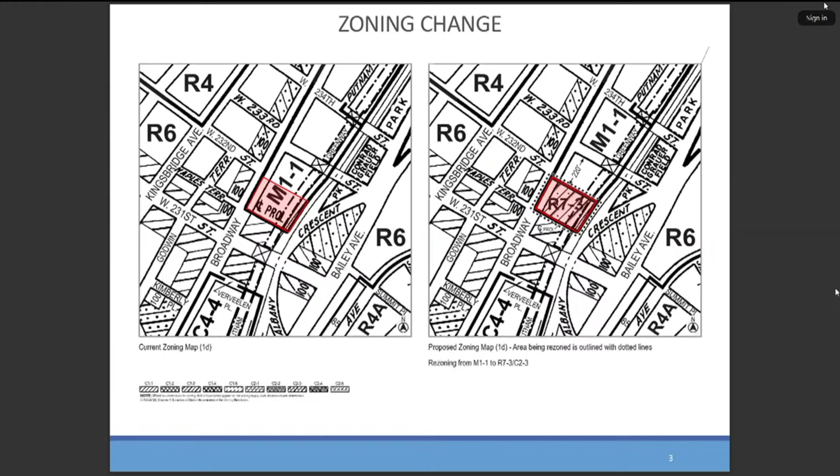So we're here seeking the approval of two land use actions. The zoning map amendment would change the existing M1-1 zoning district to an R7-3 zoning district with a C2-3 commercial overlay. We are also seeking a zoning text amendment to establish a Mandatory Inclusionary Housing area, or MIH area, to ensure that 25% of the residential floor area of the project is set aside as permanently affordable. We'll also note that for HPD-subsidized projects such as this one, HPD requires an additional 15% of permanently affordable units to be set aside. Next slide, please.

Here's the site plan. The architects worked with this very constrained site. The site's essentially flag-shaped with minimal frontage on Broadway. The design goals were to accommodate the affordable housing program and maintain parking at the site to avoid disrupting a neighborhood parking resource. The configuration of the site with this limited street frontage proved challenging, but the R7-3 bulk envelope allows for a design that provides a sufficient number of affordable units and allows for parking. The R7-3 is appropriate for an affordable transit-oriented project like this. I'll note that the required yards on both sides of the rear portion of the building create separation from the existing non-applicant-owned buildings along Broadway, and the greenway at the rear, or east, of the site. Next slide, please.

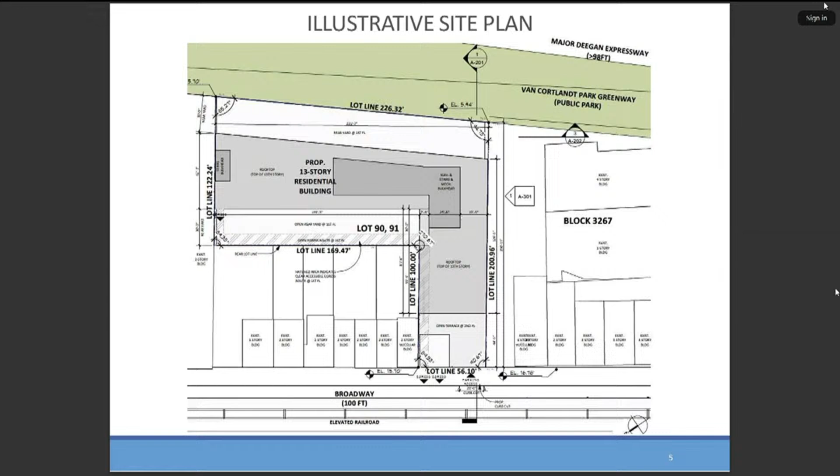Just have 2 more slides. In this slide, you can see the building within the existing built context of the neighborhood.

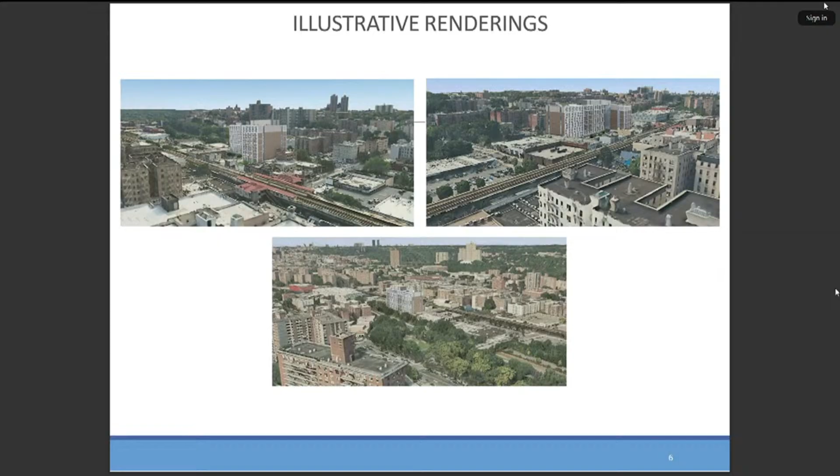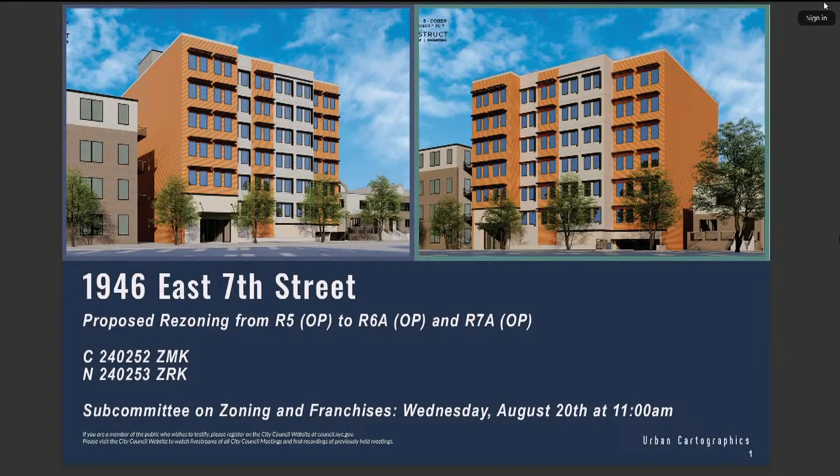And if you can go to the next slide, the right-hand side of that screen would show you that it has 47 apartments, single 1-bedrooms, because seniors desire mostly 1-bedrooms, a larger than required rear yard of 35 feet, where a 30-foot rear yard would be required, and the building is proposed to be at 6 stories, the result of a proposed rezoning that will rezone that corner to R6A, which you could see in the middle of the slide. And at the bottom, you could see the corner itself would be R7A.

The left side of the screen shows you the series of existing 4-story buildings that we're speaking of. The two that you see on the left-hand side next to the single-family home would be replaced by the 6-story building on the right side of your screen, essentially creating new housing opportunities for people in the community that are seniors. Next slide, please.

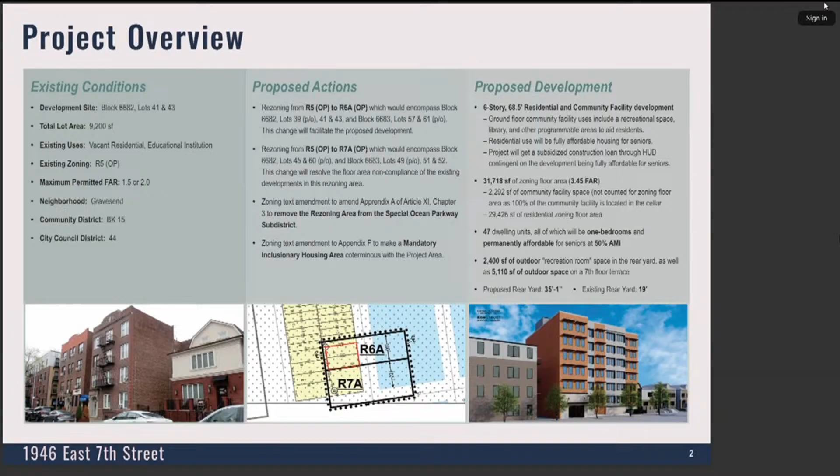This shows you the zoning map change in specific detail. The left side of the map shows that we're situated within an R5 district. It also shows, signified by the big letters OP, that we are in the Ocean Parkway sub-district.

Part of the application, in addition to requesting the R7A and R6A zoning, would also request the removal of the property from the Ocean Parkway sub-district. The sub-district was put in place to prevent the proliferation of larger community facilities, at a time before there was such a pressing need for housing. So that is the justification for removing it here.

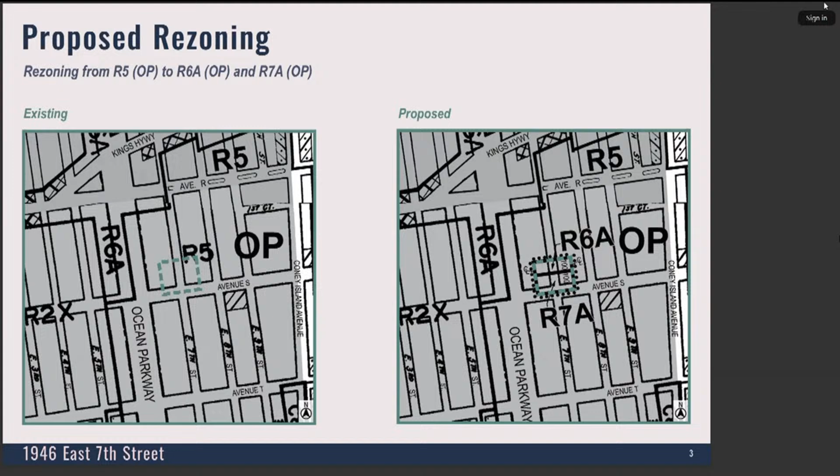Next slide, please. This shows you in more detail what I was just speaking about. Next slide.

If anybody is curious as to how long an application in New York City to create affordable housing takes, it takes 7 years, and then there's still no guarantee that when you get to the end of the ULURP process, you'll get it approved.

This application started 7 years ago. The left-hand side shows its original incarnation, an 8-story proposal. It was proposed under what was called AIRS, Affordable Independent Residences for Seniors. Somebody in their infinite wisdom decided they didn't want to keep that program going a few years ago, and that program was removed from the city's zoning resolution.

That left us with the proposal you see in the middle, which culminated after City of Yes was proposed, which brought the building to a 7-story building. So we went from an 8-story building to a 7-story building.

And now, after meeting with the community and having extensive conversations with them, even though the community board did oppose it, you'll find testimony on the city planning record indicating a 6-story building would perhaps be acceptable. So on the right-hand side, in response to the objections raised at the Community Planning Board and concerns from neighbors, we have reduced the size of the building to 6 stories in height, and removed the bulkhead that was previously proposed.

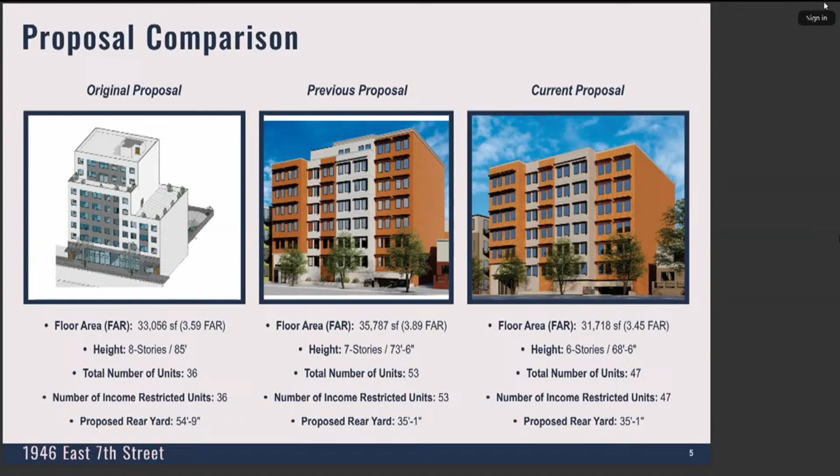The next slide gives you an example of how long we've been at this and the numerous iterations of the proposal, for the reasons just stated. It gives a chronological history: the original proposal, the response to community concerns in reducing building height, City of Yes bringing the height back up—which wasn't the brightest move on my part, as it upset a lot of people—and now we've brought it back down to 6 stories. So this is our proposal now, a 6-story building.

If you go to the next slide, please. The next slide tries to make a very strong land use argument and a rationale that this is the right place and the right spot for the right building.

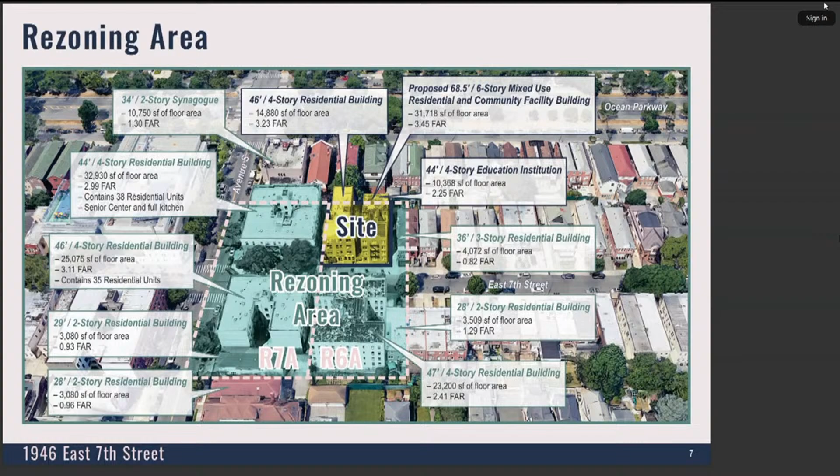All of the buildings you see in green, turquoise, and yellow here are part of the same Ahiezer organization. What you can't see on the left-hand side, you'll see clearly on the next slide—it shows all the buildings that are part of this community that thousands of people utilize, providing much-needed social services: help with finances, help with food, food distribution, educational classes, social programs, programs for children, adults, and higher or continuing education. All of that occurs in the buildings highlighted on the screen. They are all owned, controlled, and operated by the Ahiezer organization, which has been operating at this location for decades.

Many people at the community level were upset with the proposal. In fact, I received opposition on this application like I've never received on any application I've ever sought to pursue in New York City. I believe the reason for so much opposition is that the area is already developed with existing community facility uses that some people in the neighborhood may feel are overbearing upon the community.

My response to that is, but that's where the people are. If you ask us to move this building and build it somewhere else, it's not going to be for the very community we're trying to serve. I'm going to show you a slide in a second that shows the lack of affordable housing that's been built in this community over the past few decades.

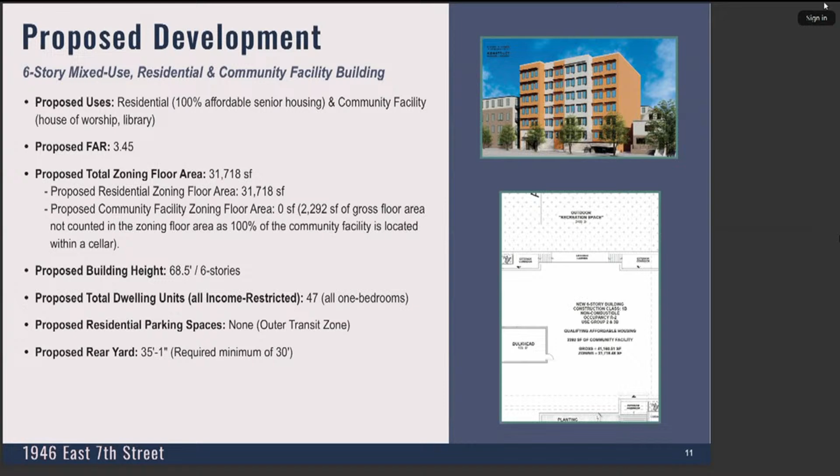The buildings surrounding us are 44 feet. The center's building is 58 feet tall. Our building is 68 feet tall. The point is that the neighborhood, although opposed to the tall building here, is not a stranger to taller buildings, few of which serve as much of an altruistic purpose as this would.

The slides got juxtaposed. I created this slide because people are telling me the building is too tall, it's out of character, doesn't fit within the block, and will cause mayhem. I'm showing you that if I brought my mother, who's 83 years old and doesn't know much difference between building heights, and put her on the street and asked what she thinks of the building on the right compared to the one on the left, she'd look up and say, 'is it taller?' The reality is it's not much taller than what's existing there right now—22 feet taller, which from street level isn't much of a perceptible difference.

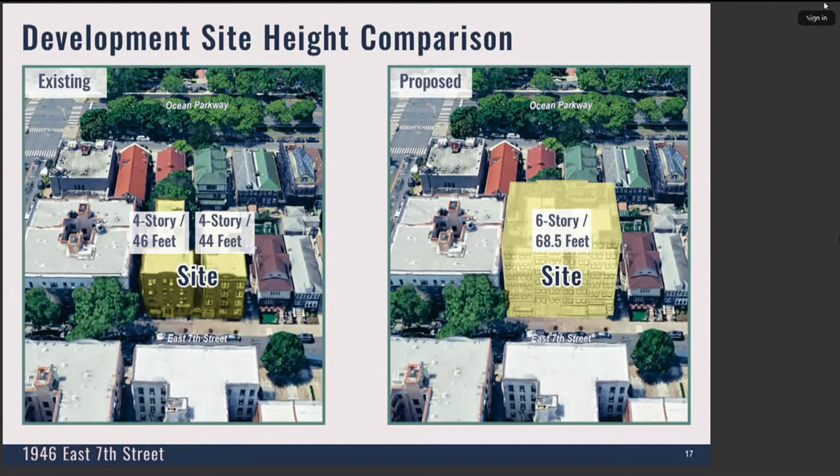The owner, the operator, Ahiezer organization, Elliot Harari, is here today, and has gone through great lengths to direct his architect to try to accommodate community concerns. One of the concerns was the rear yard of the building. The rear yard is proposed to be 35 feet. As you can see here, it's required to be 30 feet, and it's substantially larger than most of the other rear yards.

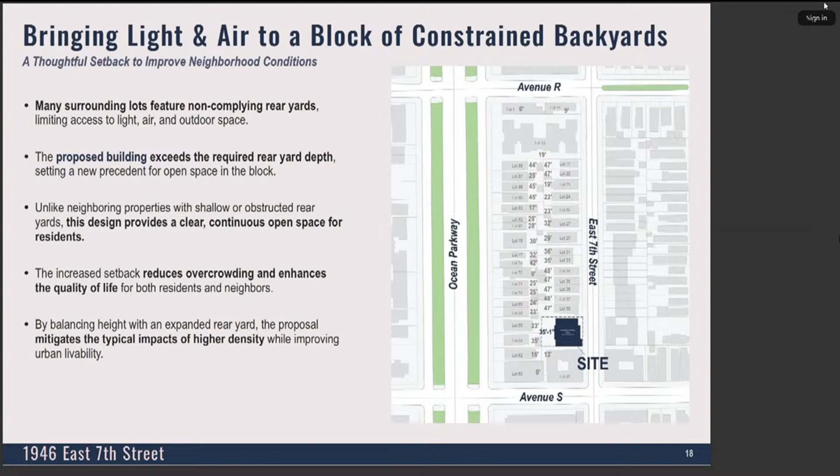I will wrap up by clicking ahead. If you can click ahead to slides 21, 22, and 23, it should be a pink slide. There you go, 2 more please, 1 more please. Okay, this slide is... and I'll stop here.

There is community opposition. I'm sure as God made green apples, there are people opposed to it. There's also support from the borough president, support from the city planning commission, and some community support that's not voiced as loudly. The councilman is in a very difficult position here. I respect him and his decision-making abilities, and he's got quite a few pieces of information to weigh. Everybody involved in the process has been fair. Everybody thinks the overarching goal is deserving, and I hope we all come to the right decision together.

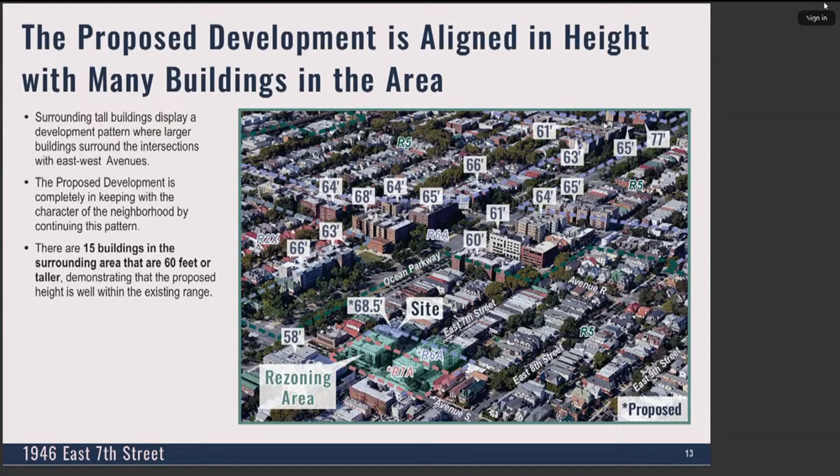So I just want to know, if you can please, the proposal is facing unprecedented community opposition. And you mentioned yourself that usually there's a deference when people want to build for the community. Can you explain how you believe this aligns with the existing character of the neighborhood, particularly in terms of scale, density, and overall use?

Would you like me to respond, Councilmember? If you want, if you want to say that it doesn't, then... Well, you know, objective, yeah, but not. I disagree on the character issue only because of what I showed you to the room a few minutes ago. There's existing 44-foot tall multiple dwellings on the property right now.

This building is proposed to be 24 feet taller, somewhat analogous to the height of the community center on the corner that stands at about 50, 58 feet, so just 10 feet shorter than that. I don't think we're worlds away from the existing buildings, and I think we could all understand that in today's society the spatial demands of people's living needs are different than they were decades ago, and buildings with modern facilities, modern heating systems, recreational spaces and community spaces are preferred to buildings that are 100 years old.

If this is not approved, the question was asked before, what can we do? Well, one option would be to retrofit the existing 100-year-old buildings and make those senior housing. That's allowed to be done. And all of the concern being given about traffic, noise, garbage, people coming, and the elderly causing a commotion or adding to the commotion on the block would still be there.

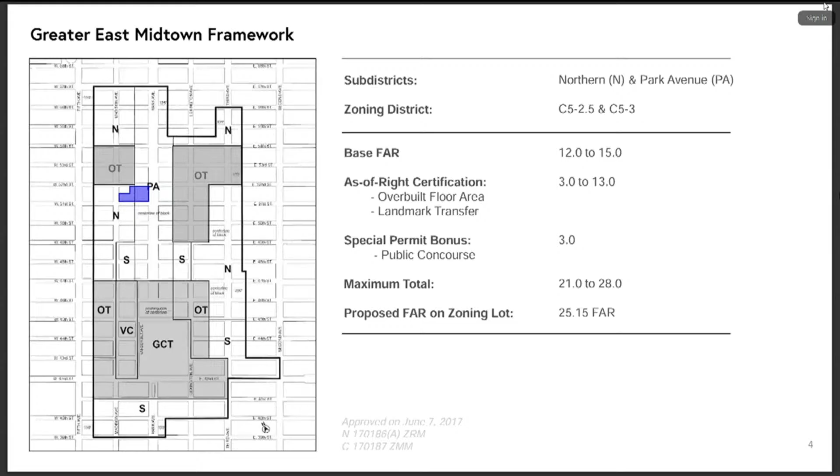I'll start with the bottom of this slide. There are 2 as-of-right certifications that have already gone through the process. Those get to the bulk of the floor area in the building. East Midtown attempted to incentivize the demolition of outdated, overbuilt buildings by allowing a buyback of existing overbuilt floor area with contributions to a public realm fund, and also to support the upkeep of landmarks in East Midtown through an as-of-right transfer of their development rights. What's before us today are 2 special permits: the 3 FAR bonus for the public concourse special permit, as well as certain waivers available for a building using that extra floor area under the qualifying site special permit.

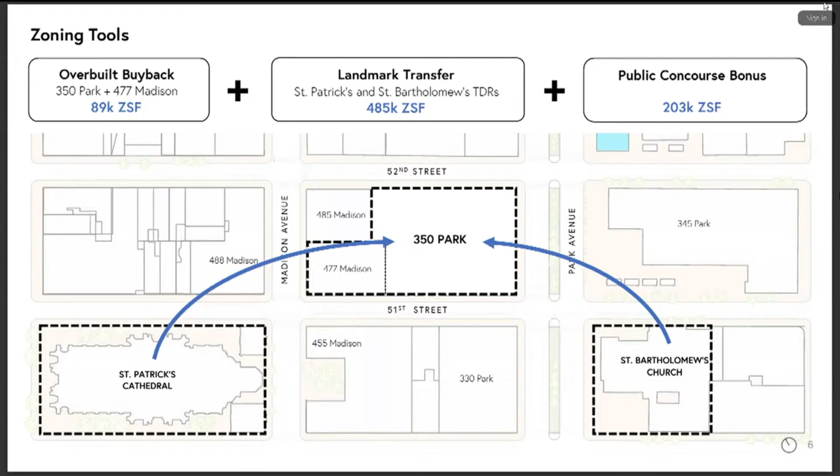This is an illustration of where the floor area is coming from, with arrows coming from St. Patrick's Cathedral and St. Bartholomew's Church, which comprise the bulk of the floor area for the addition in this new building. There's also the overbuilt buyback of 89,000 square feet and 200,000 square feet of public concourse bonus.

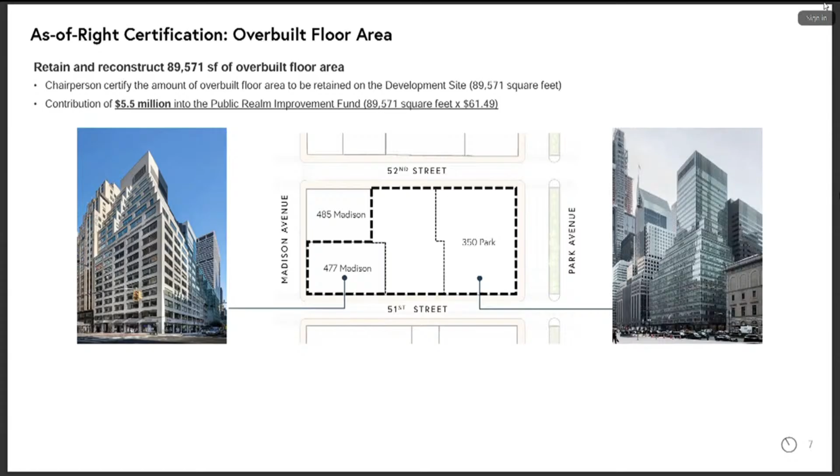These as-of-right certifications result in a contribution to the Public Realm Improvement Fund. For the 2 overbuilt buildings on this site, it results in a $5.5 million contribution to the Public Realm Fund. The transfers from the landmarks each come with an additional contribution as well, totaling an additional $30 million to the Public Realm Fund—a very sizable overall contribution.

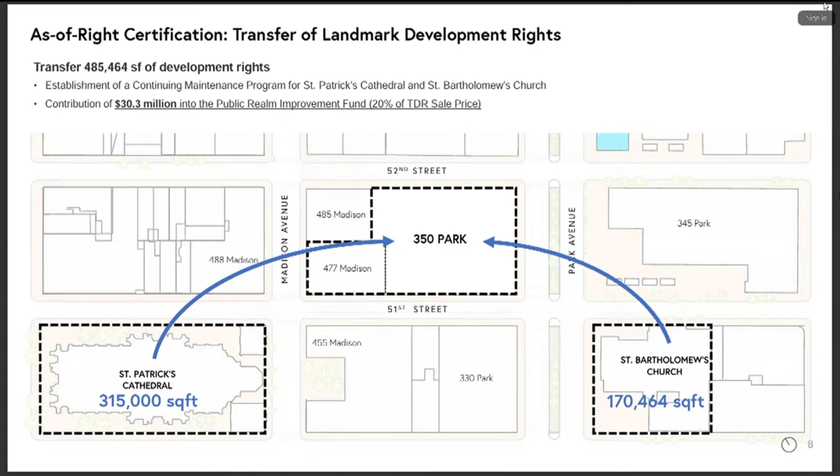So there are very material supports for these historic structures in the district, totaling about $150 million to ensure the future upkeep of these gems in East Midtown, as well as almost $36 million into the Public Realm Fund for the governing group to decide how to use for projects in the district. I'll hand it back to Barry to walk you through the building and the public concourse.

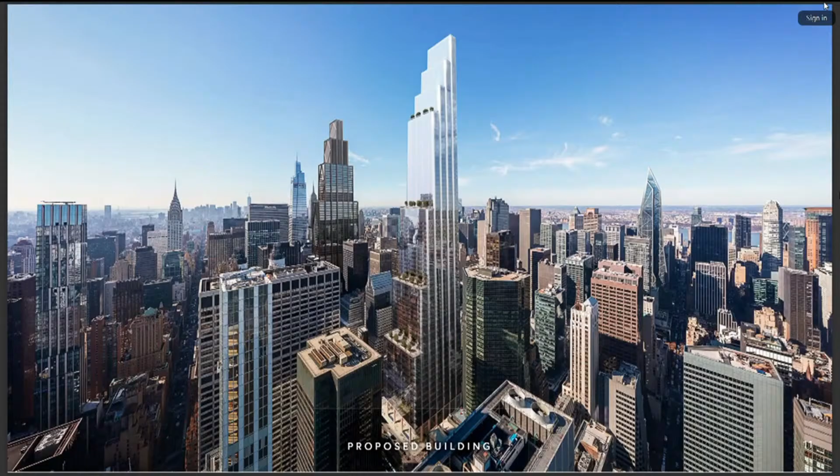Here's a rendering looking southwest of the proposed building, designed by Foster & Partners. As you can see, the building steps back off of Park Avenue. Its north and south facades are articulated by a series of flutes that run the full height of the building. The building also leans in from both 51st and 52nd Street to maximize light and air down to Park Avenue, as well as to the 2 adjacent side streets.

The building will be highly sustainable. In fact, it is using the ultra-low energy tools within the zoning resolution. It will be all-electric, with a triple-pane facade. Vornado is a leader in sustainability, and our best efforts are reflected in this design proposal.

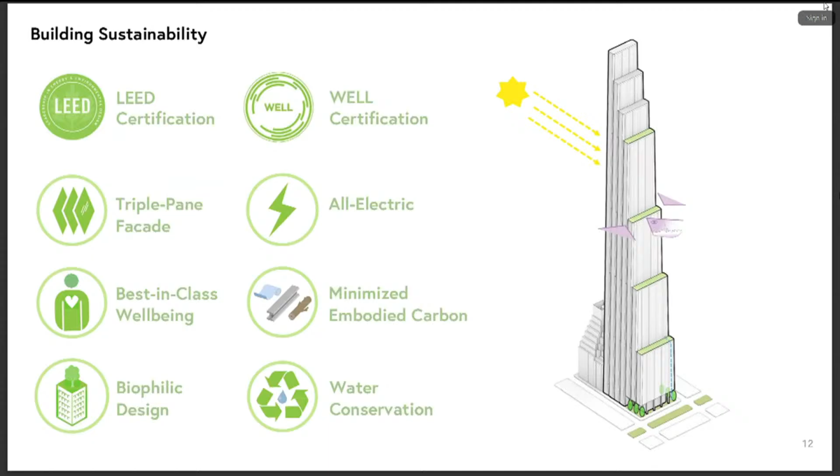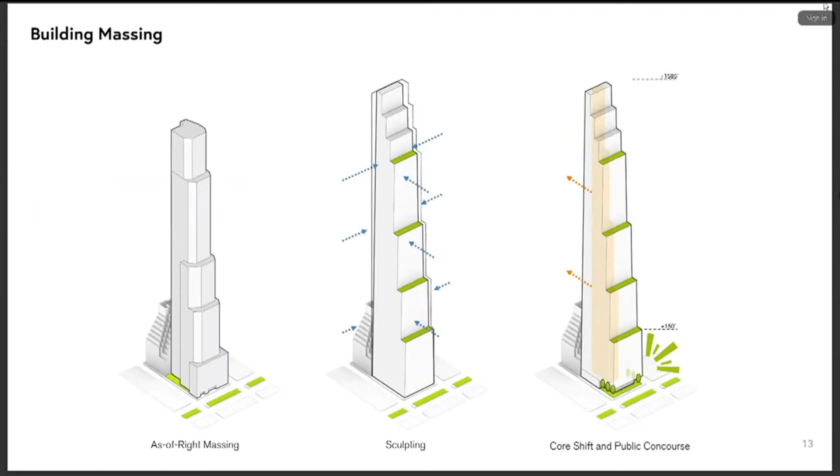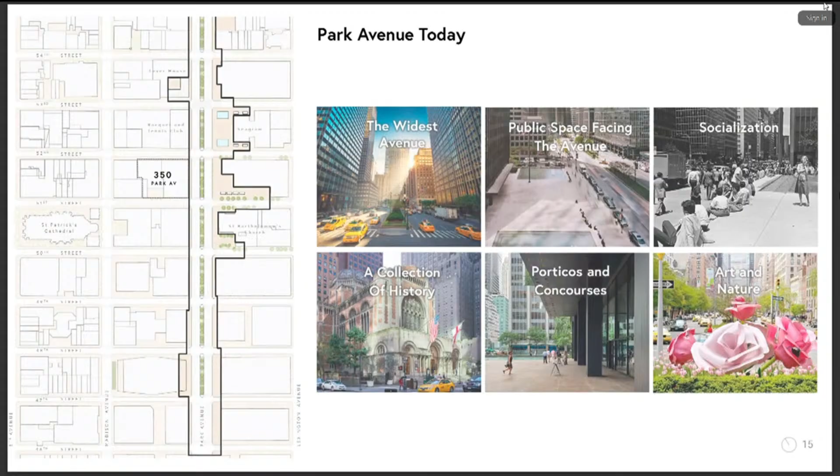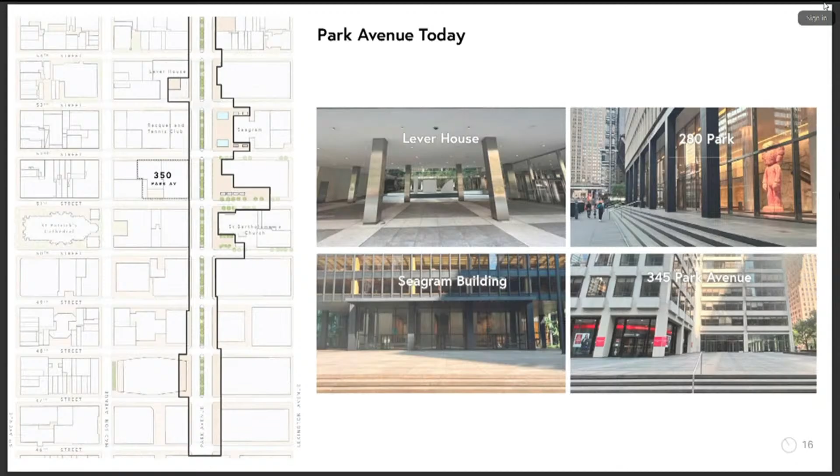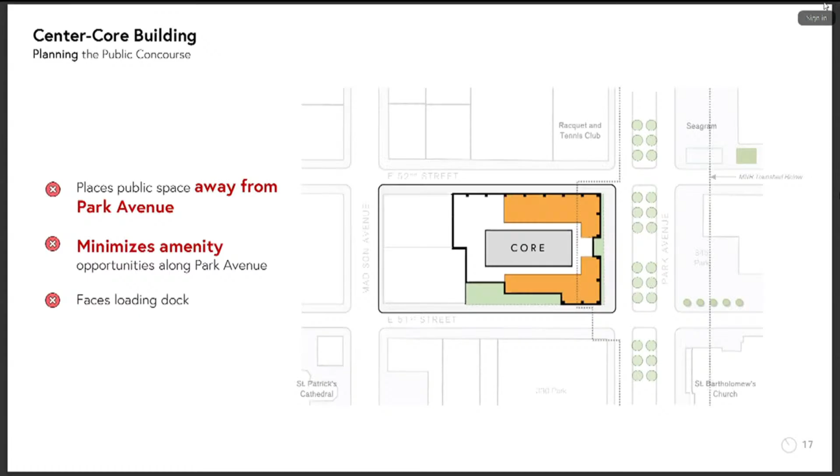Several of the public spaces along Park Avenue are elevated by several steps, a direct response to the Metro North train shed that exists underneath Park Avenue beneath several of these buildings. In an as-of-right building, the avenue frontage would normally be occupied by bank branches or, in some cases, even a Ferrari dealership—the normal condition on Park Avenue—with public spaces located on the south-facing block on 51st Street, adjacent to loading infrastructure and other things typically found on 51st and 52nd Street.

The proposal is to dedicate the Park Avenue frontage and the corners to the public concourse space. We're doing that by pushing the building's core further into the footprint of the block.

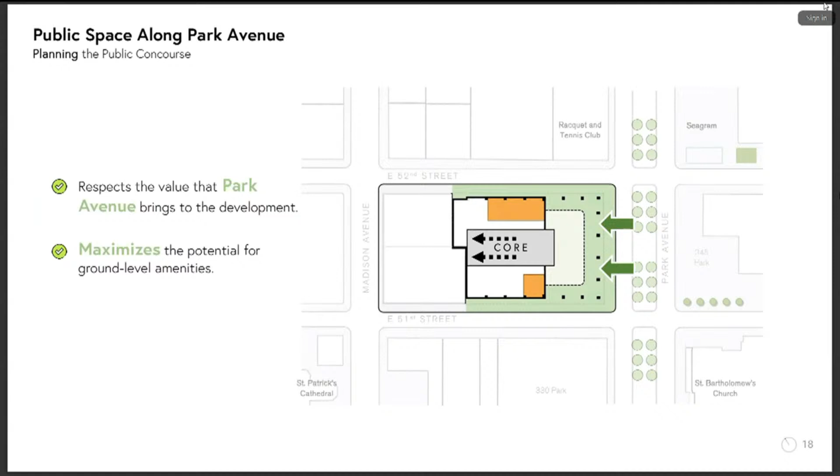We're also proposing to open up the corners of the project by cantilevering the structure out, removing the columns that otherwise would be there. That creates view corridors to the adjacent landmarks at the Seagram's Building, St. Bart's, and the Racquet Club.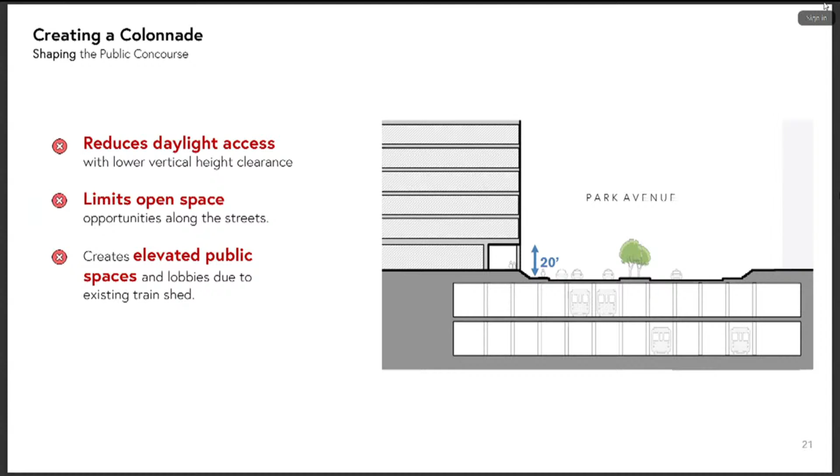We have been working very closely with both the MTA and city planning to remove those physical barriers by recessing into the train shed elements like the tree pits that support the landscaping and other elements. Obviously, that creates a more fluid experience between the sidewalks and the public concourse, one without barriers to entry.

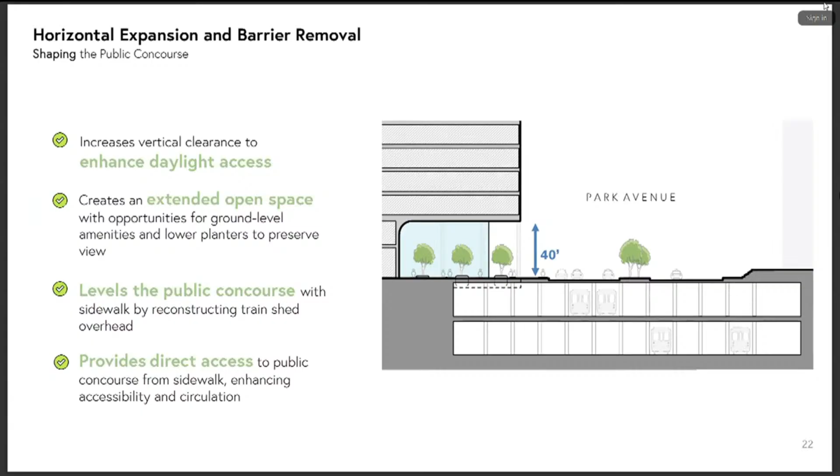In 3D, you can see here how that plays out. I would note there's a 4-foot elevation difference between the upper left-hand corner of this image and the lower right. That elevation difference has been mitigated along the entire frontage seamlessly with the sidewalk elevation and has been isolated to two very shallow ramps that exist heading up to the lobby of the building.

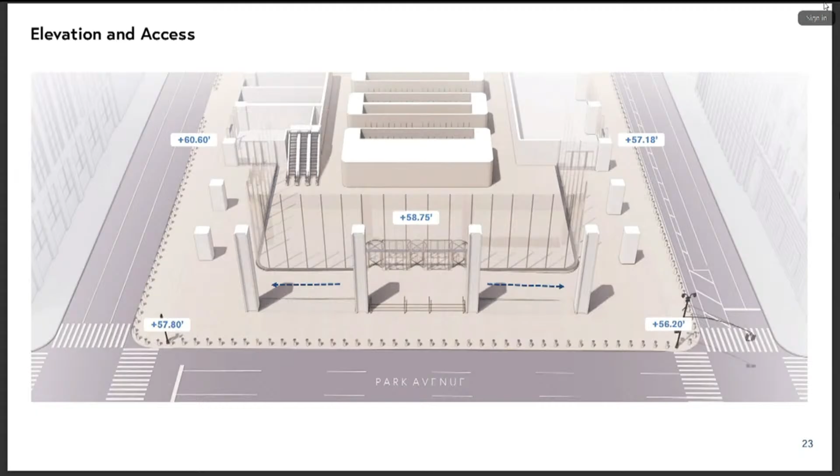Using all the tools of our design team and of what makes great public spaces, the public spaces are fully amenitized with seating, with planting, with trees, with food and beverage spaces to create a lively environment. And out on Park Avenue, 2 water features. Think about the water features in front of the Seagram's building. There's a great amount of that kind of learnings on the existing Park Avenue.

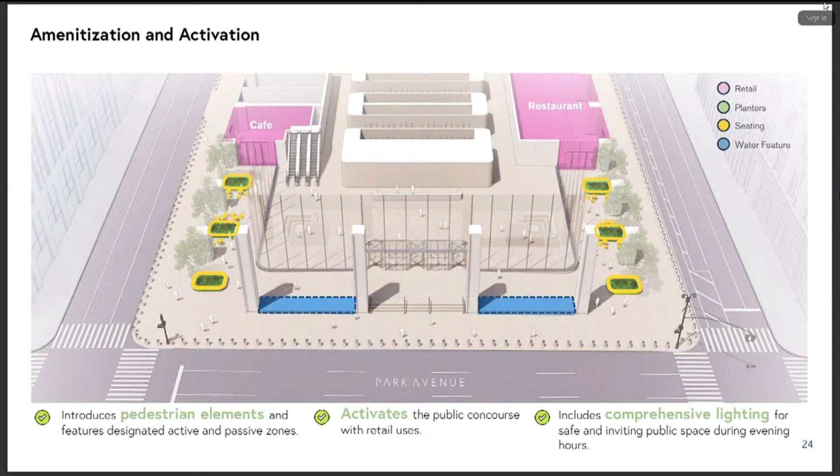This is a sequence of renderings I'm going to click through pretty quickly. Here's the existing view. There's one of those bank branches, a Fidelity branch of the existing building on the corner of 52nd Street. The proposed public concourse and the building as proposed.

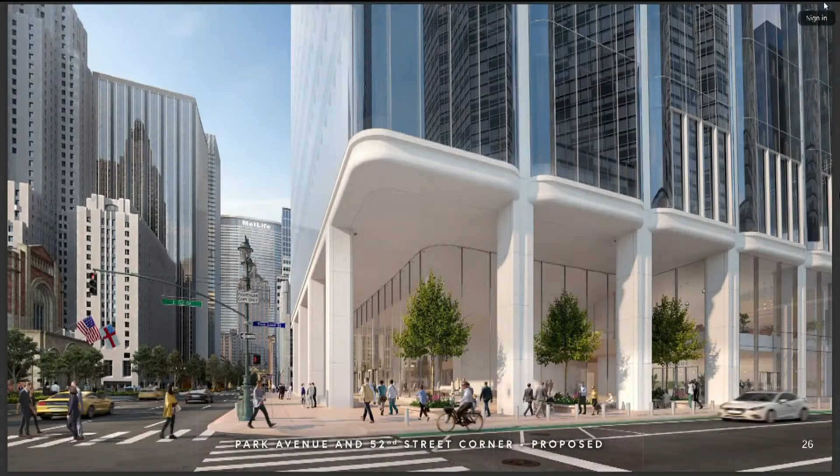A view from Park Avenue. This would be standing on the steps at 345 Park. We've taken liberties in this image to demonstrate what the city has indicated will be a kind of park structure existing along the Park Avenue median. That design is not final, but the intention is that the public concourse ultimately allows for the public space and the Park Avenue to play off each other both visually and connecting.

Here's a view at the corner of 51st Street. As I click through the sequence, we'll highlight some of the amenitization I mentioned earlier. The public concourses include movable seating and fixed seating. In our experience, the movable seating works very well with the fixed seating to allow for conversations, people to create spaces that they want to use the space well. It's all high-quality materials.

Field operations, our landscape architect, who some of you may know from their work on the High Line, has specified a very robust planting program to activate these spaces. It provides not only shade but visual interest.

Our design team at Foster & Partners is famously known for Apple stores. So as you can imagine, the glass in the storefront will be one of the most transparent elements of the project, which allows views straight through from 51st to 52nd Street, opening up views of the adjacent landmarks and other spaces. Here's a view of the 52nd Street side of the public concourse.

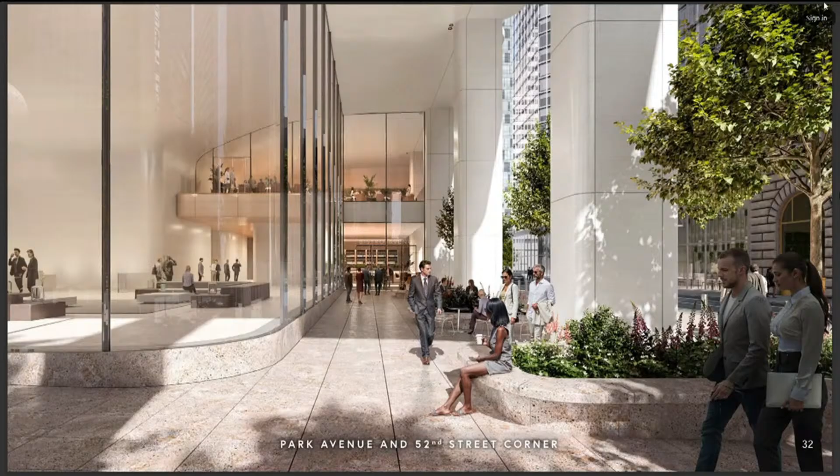It is anchored at the western end by food and beverage spaces on both the 51st Street and 52nd Street side to activate the space.

A view of the corner. As I noted earlier, the corner columns have been removed to open up circulation and visual connectivity between the public concourse and the adjacent sidewalks.

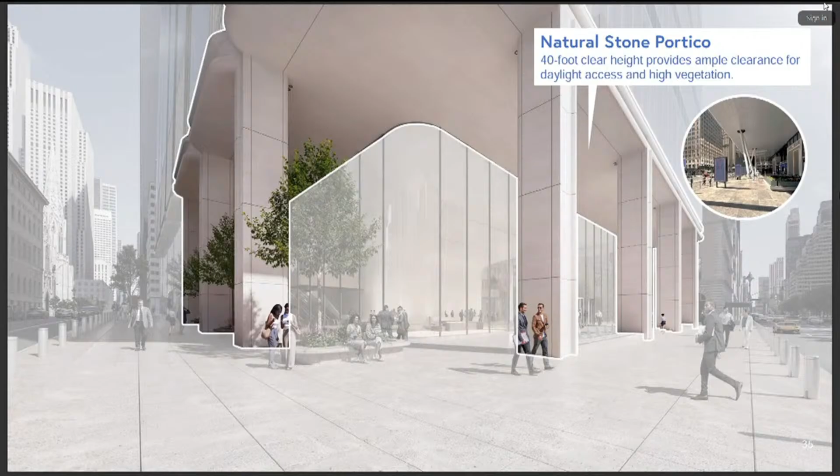This arcade has been set at 40 feet high. For those of you that know Vornado's work at Penn Station, the space in front of Madison Square Garden has a similar arcade that's 40 feet high. That is a soaring height. It's pretty spectacular how high 40 feet is.

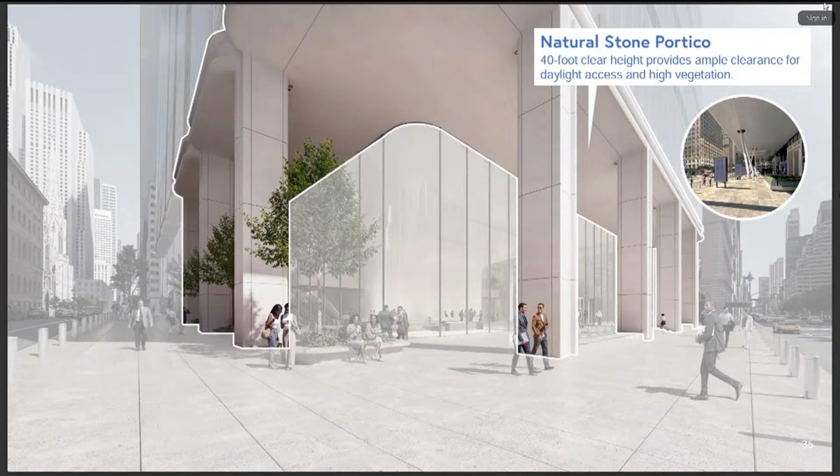As I mentioned, the corners have been opened up to create visibility.

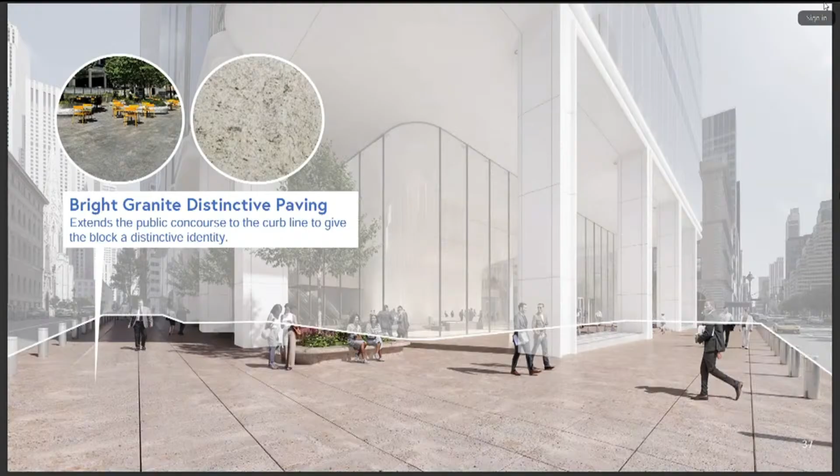Our intention, working with both DOT and the Design Commission, would be to expand through a distinctive sidewalk program the materials of the plaza directly out to the curb, to enhance the amount of public realm space that this project is intervening in.

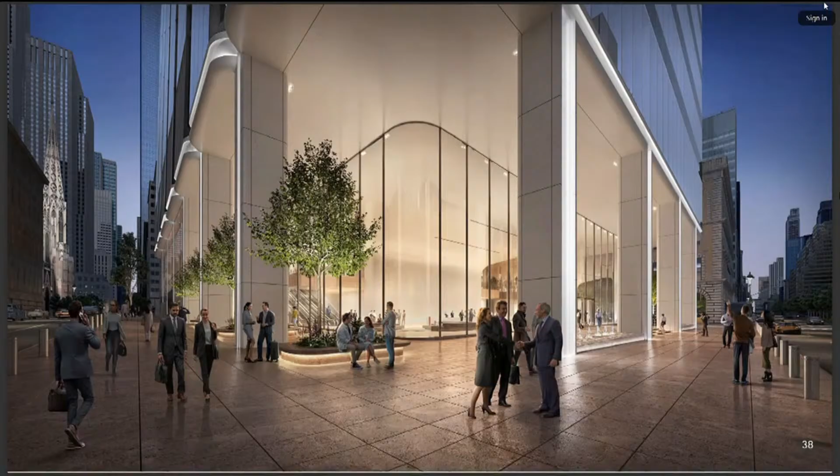It features a robust nighttime lighting program to ensure both safety and visual interest. Here's a view along Park Avenue.

You can see the very shallow slope of the ramps up to the lobby. There are no handrails because these ramps are very shallow. It doesn't require it, so it's very accessible space.

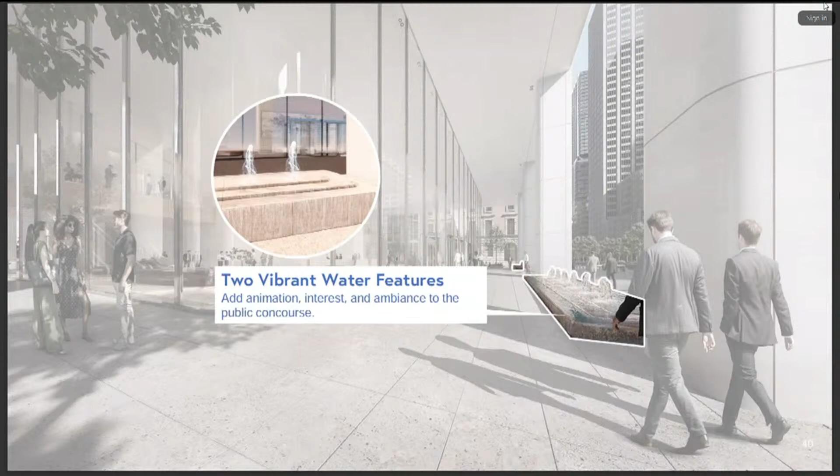On the right-hand side, this image highlights the two water features that front Park Avenue. Those water features, in addition to providing visual interest as people walk through the public concourse or on the adjacent sidewalk, also seek to hide that subtle ramping that happens from the street.

Next slide. Don't forget white noise. And white noise. Thanks, Zach.

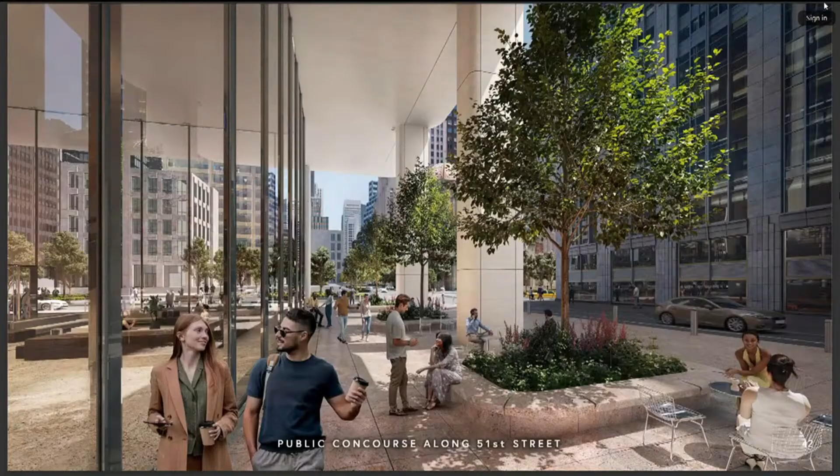If this proposal is approved, this is the public concourse experience that replaces on 51st Street today.

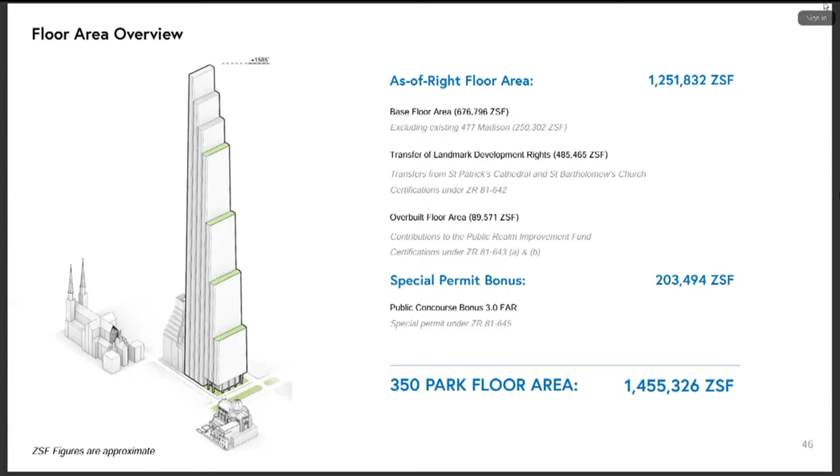The companion action is the waivers that are permitted to be applied for in connection with a qualifying building like this, for height and setback, qualifying site rules, and mandatory district plan elements.

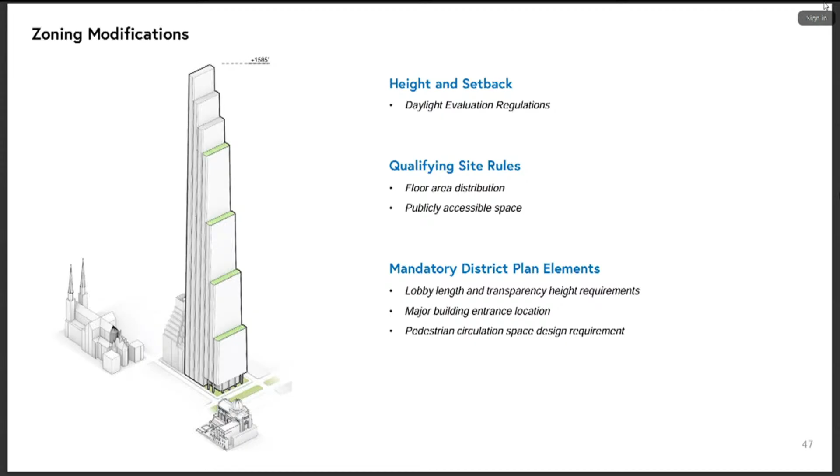So to conclude, we're very excited about this project. It'll be the first ground-up new office building on Park Avenue in many years to start. It has secured an anchor tenant in Citadel and Citadel Securities.

We believe this project is a great investment in the city, but also a great use of the East Midtown program and rezoning that this council and the City Planning Commission put in several years ago.

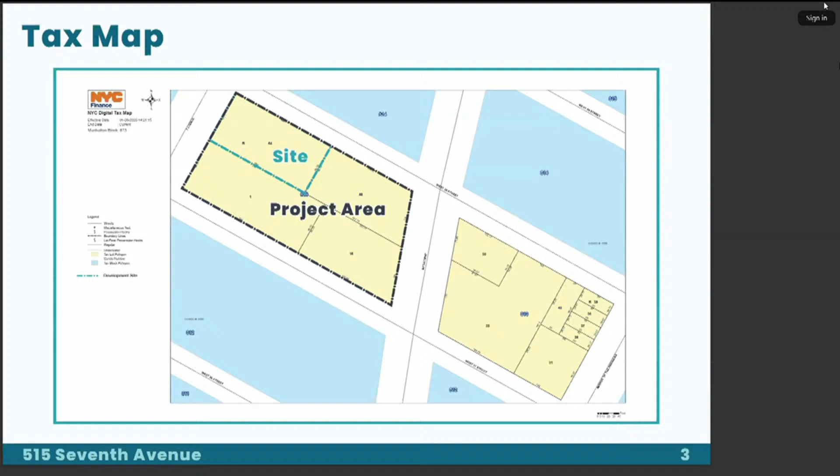Again, showing the development site. It's on the southeast corner of 38th and 7th. There are only four lots on the block. We're going to be the smallest building even after these actions. Next slide.

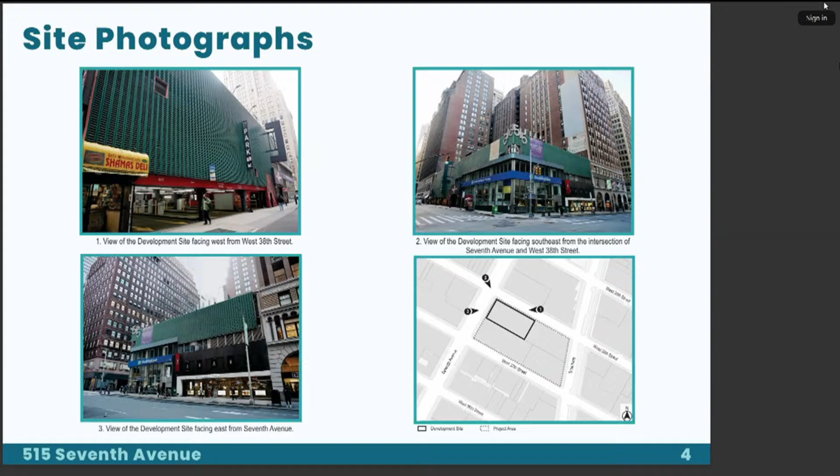The existing site consists of a 4.5, 5-story parking garage with some retail. It's not very attractive. We propose replacing it with a really Class A office building or office-hotel building.

We've added in a public restroom. The community board was very happy with that, as was the borough president and the planning commission. Next slide, please.

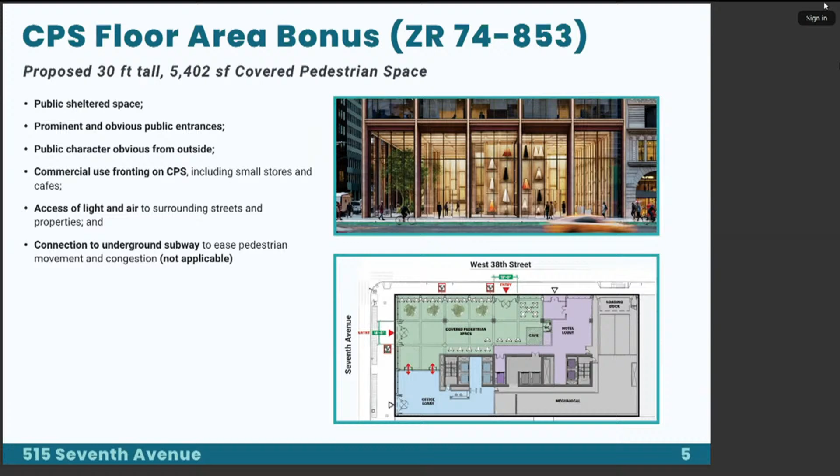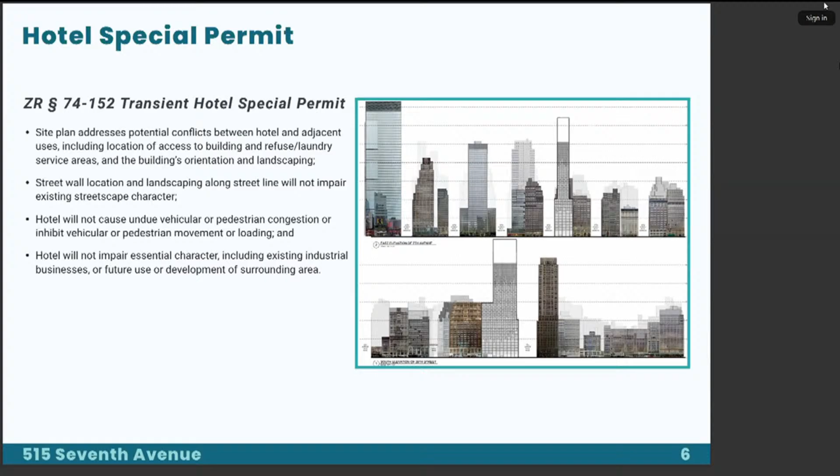The special permit for the hotel is required. We've been working with the Hotel Trades Council — this project has been going on pre-pandemic. They support the project, as does 32BJ. I'm hoping both will testify in support today. Next slide, please.

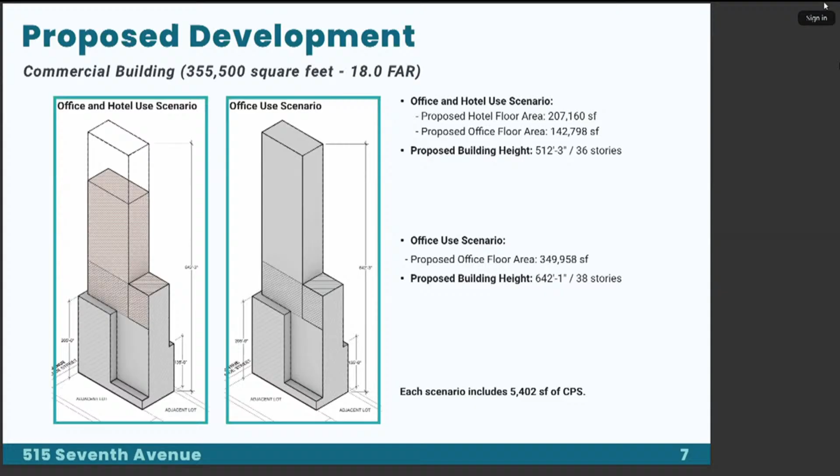This shows the two options. The applicant will decide, based on market conditions, whether he builds an office building or an office-hotel building. But here are the two options.

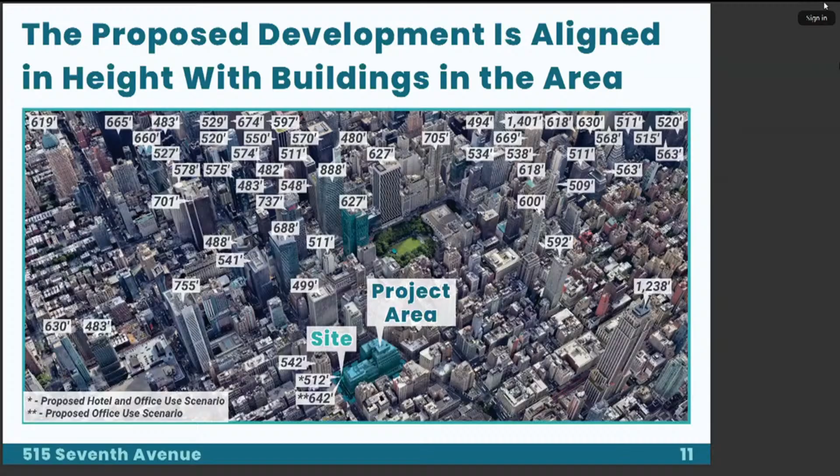I promise I would speak quickly. And I like you already. Thank you.

Just a couple of questions. You spoke about the usage of the building, which will be a hotel or office. When would you make that decision, and what will determine it? We're working with the applicant right now. Honestly, they haven't made up their mind. I think it will be a reflection of market conditions. But also, the world is a little crazy right now - tariffs in, tariffs out, 25% on steel. All these factors will decide what we build, but I can't give you a date when that will be done.

Do you have potential tenants for either already? At this point, because this project took more than five years to get to this stage, anyone who had expressed interest in the building has moved on. Gotcha. So we're going to kick those tires starting now.

If you build a commercial building, what types of industries do you expect will rent this commercial space, and will there be manufacturing or garment industry presence here? This will be a Class A office building. If it's only office, we have the open space on the base. There will be no retail other than the cafe in the open space. Just as the previous applicant described, there is demand for Class A office space, and this would add to it.